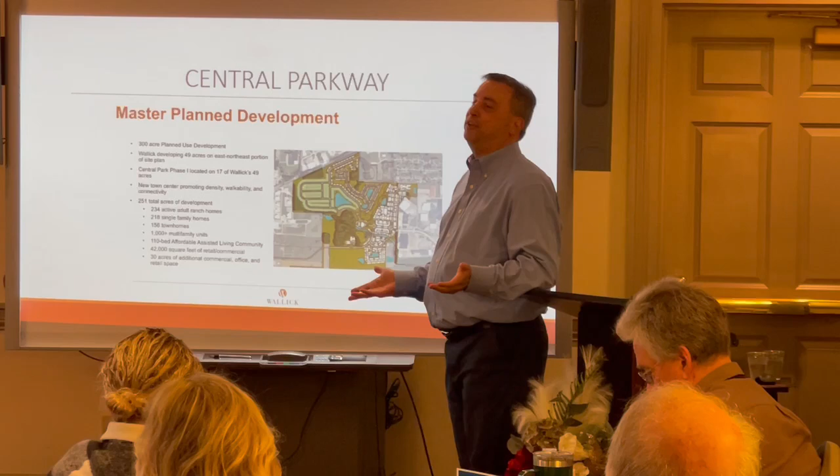You may have heard this quite a bit. I'll tell you, if you think you've heard about this for a long time, I've been working on this for a much longer period of time than that. But I'm excited to say I'm pretty confident that we can anticipate seeing in the second quarter of this year, you're going to see some dirt start to be moved, you're going to see some utility lines start to get run. And this downtown Heath, Central Park, downtown project is going to begin.

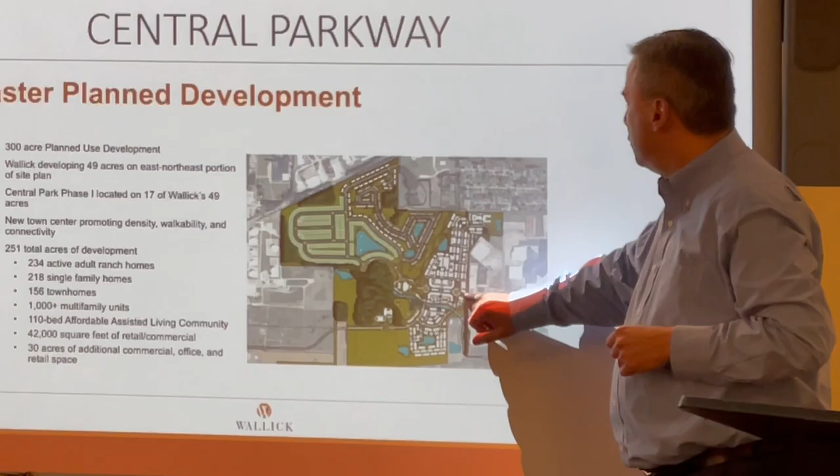Now if you can see on the board here, I'll say phase 1A of this project, you're right here, right now, at the Davis-Shai House. Phase 1A is going to take Central Parkway from where it dead ends, jog a bit to the north, come into this first roundabout, two stubs, north and south. A boulevard that will have diagonal parking in the middle will come through to this western roundabout, stub 1, stub 2.

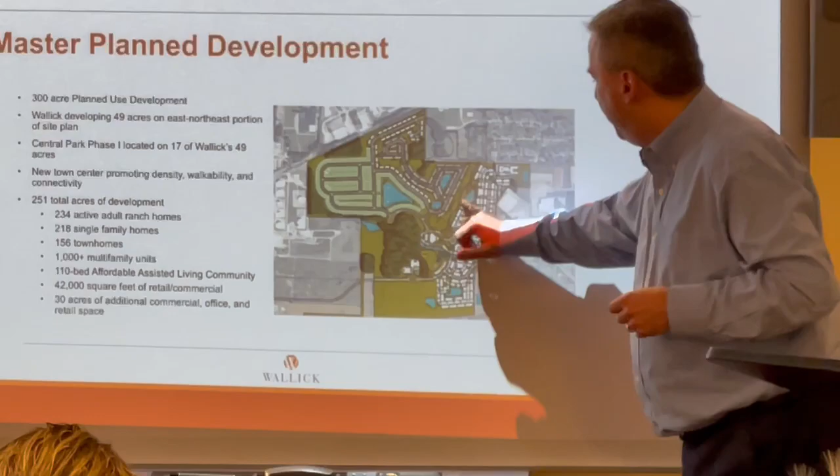Wallick is the company that is developing this piece of the project. So for phase 1A, Wallick is going to construct 2 buildings on either side of the boulevard. First floor of those buildings will have approximately 10,000 square feet of retail, commercial, office, restaurant type space, 40,000 square feet total between the 4 structures. And then each structure will have 3 floors of apartments above them.

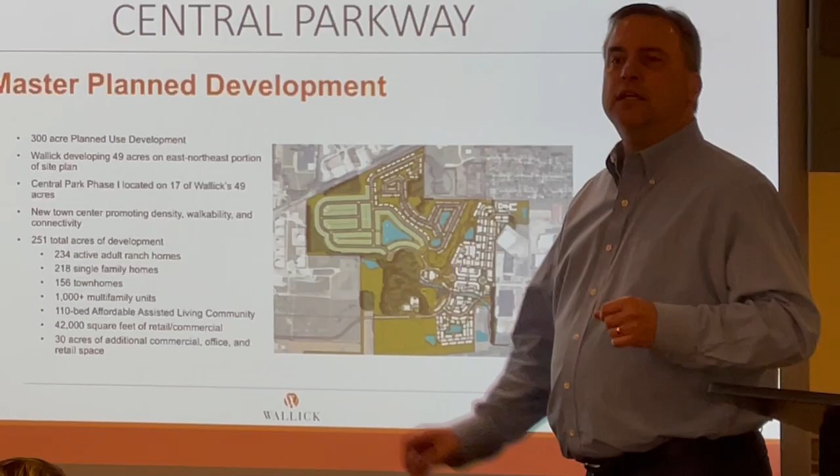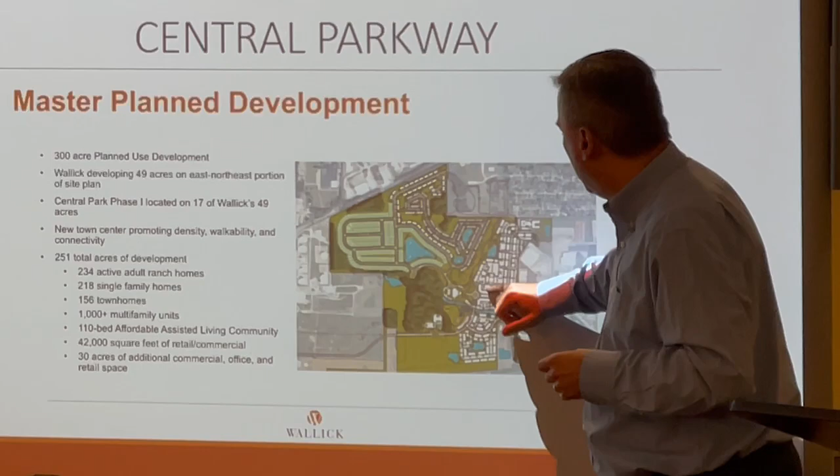Those will sit astride the boulevard, which the city, for any number of different festivals and events, we will be able to close the boulevard down. And traffic will be able to flow around it. We'll be able to close that boulevard down for city events. We'll look to establish a DORA in that area so that people can get a drink here, go to this shop there, that type of thing. Wallick, as part of this phase 1A, will construct the apartments and clubhouse structures that are going to be in this area.

Phase 1B will include Wallick constructing an assisted living facility here up against the residential neighborhood. We always felt that that was probably the quietest thing that you could have next to a residential neighborhood. There will not be a road connection into this neighborhood, so traffic will not flow here, but we're working with the Indian Mound Mall ownership, and we will establish a right of way through here where traffic then will be able to flow through here toward 30th Street.

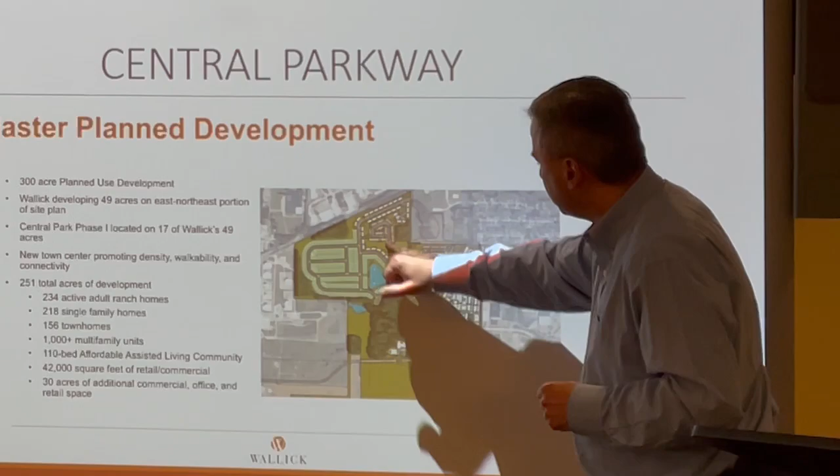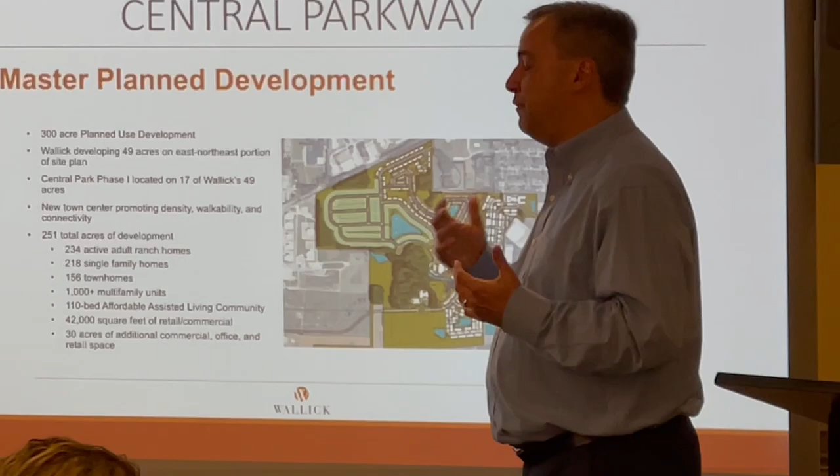Also, as part of phase 1B, this area over here, all of this area over here, our concept is a ranch on slab rental type of a unit. It attracts quite a few empty nesters. This is going to be very walkable, bikeable.

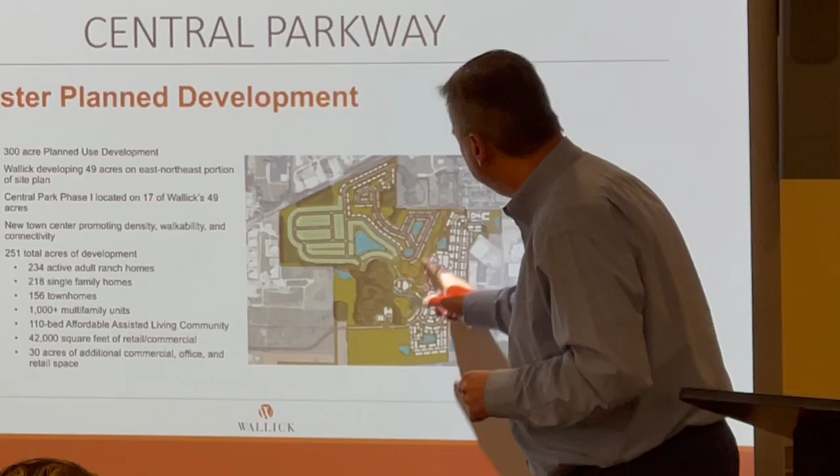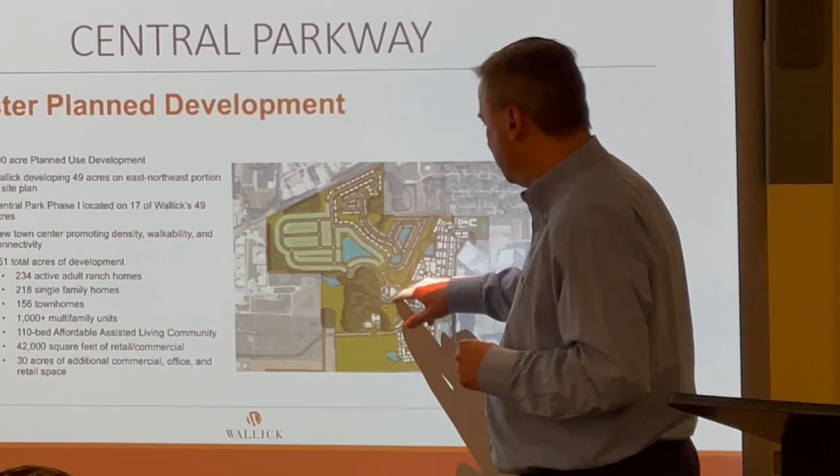You see Geller Park up here, which already exists. This lane through here will become city property, part of a park area. This area in here will become city property, potentially a new city hall, park features, potentially a new police station. So there's a lot of options, and there's going to be a lot of reasons for people to want to be here, and we're going to make it easy for them to walk and bike through the area.

This is a ranch on slab. Natalie, someday, if Emily ever lets us move out of our house, we may want to choose to live there, right? Back in here, we'll be buried in our backyard. What? We'd be buried in our backyard. That's where she wants to put it. Yeah, I know, really awkward.

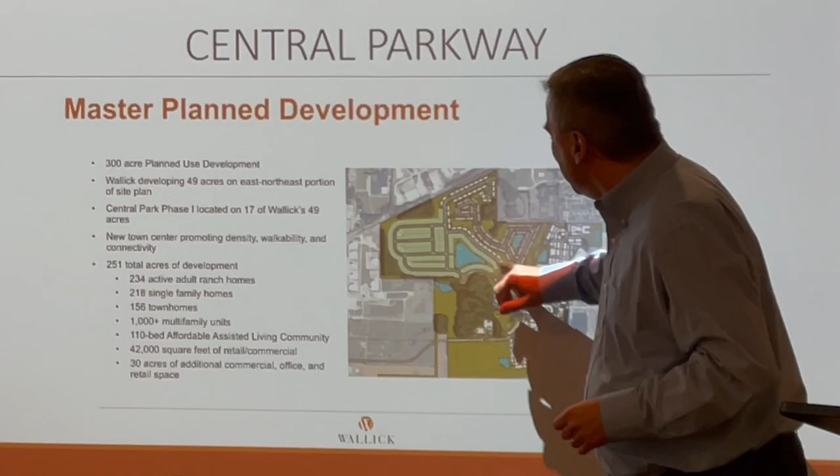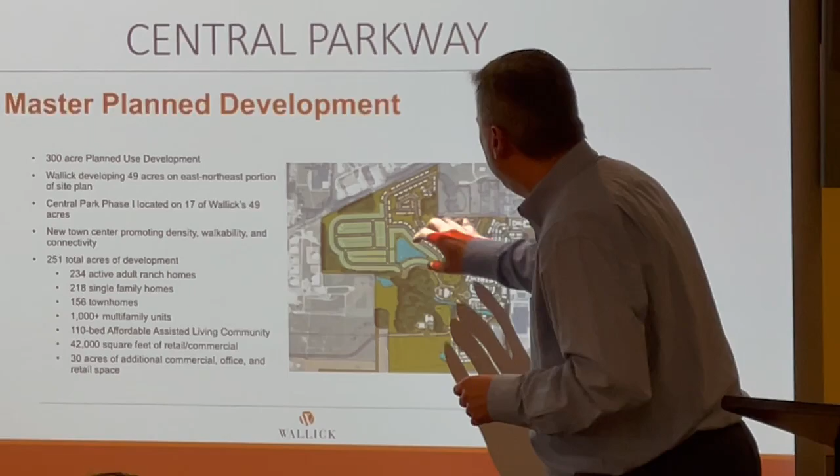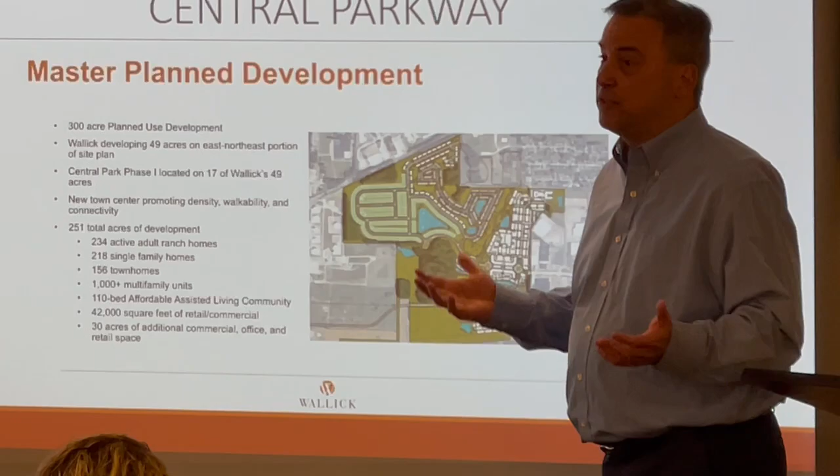Back in this area here, our concept calls for townhouses as well as single-family homes. Those pieces I'll label Phase 1B. And then this area down here, although it shows stuff, there really is no concept. There's nothing solid down in this area, which is fine for now. But we're excited about the possibilities that this could hold.

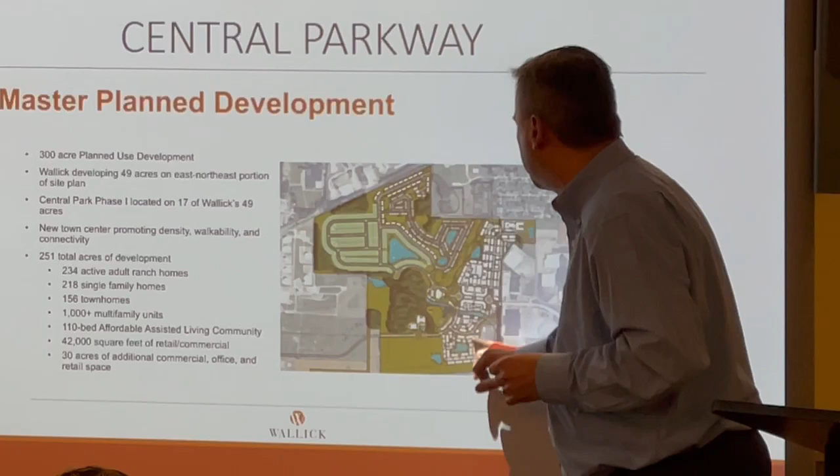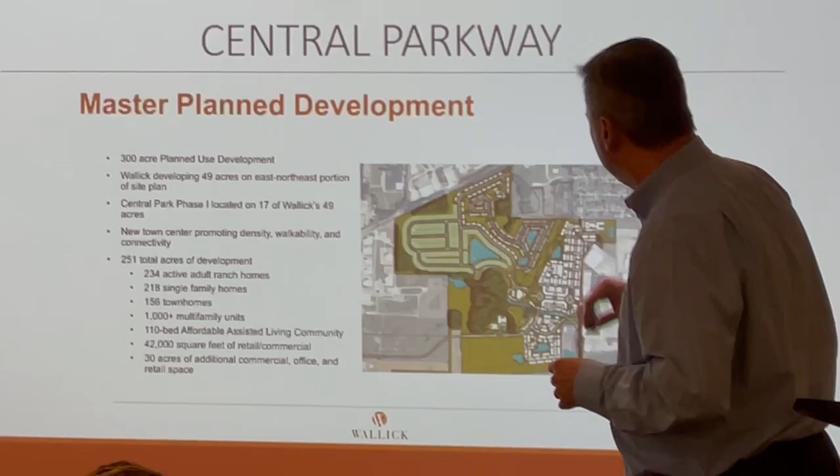So this is, as you might imagine, quite a big development. It's going to take many years for it to build out, right? The development stork doesn't just drop 500 homes in an area at one time. That's just not the way things work. So this will evolve over years and be built out over many years.

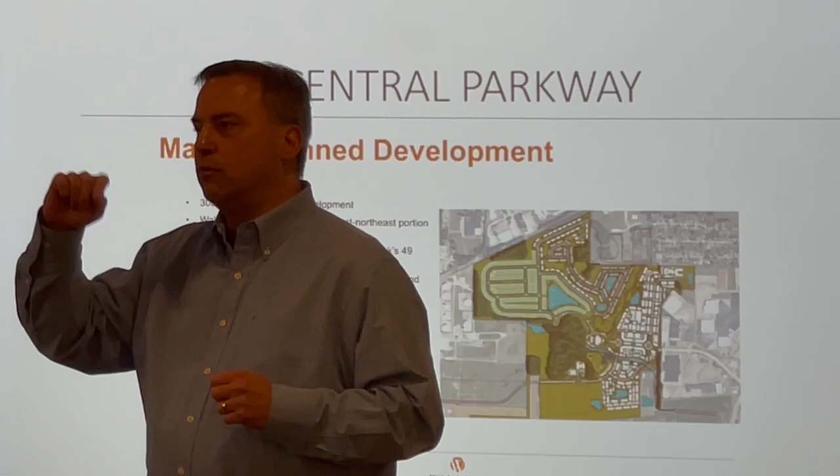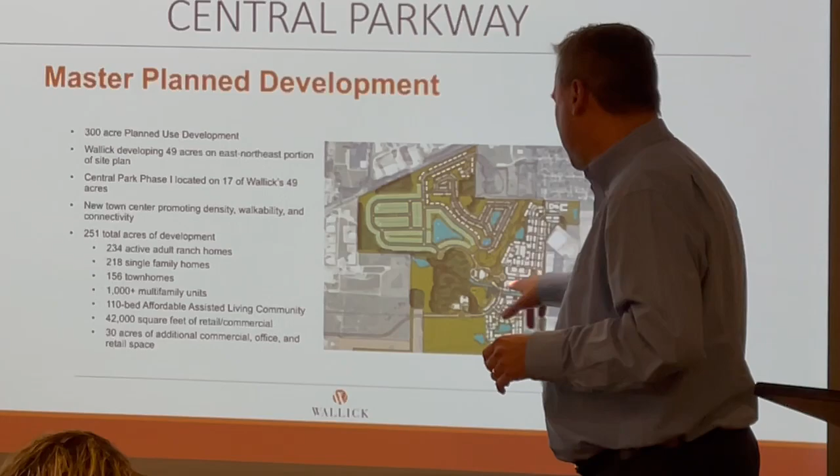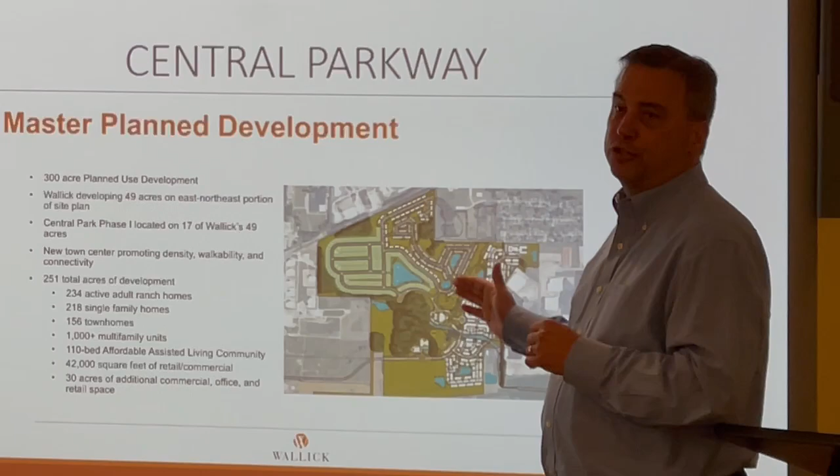But this concept is a realization of what has been a City of Heath dream for decades. I can tell you, when I first became mayor 15 years ago, there were sketches on the walls, in a cabinet on the wall of the City Council caucus room, that were done probably a decade before then, that had ideas for back here. This area has always been thought of as a place where a downtown Heath could be, where our community could have a center to come together for any number of different reasons. And so we're really excited as a city to be part of the public-private partnership that has made this concept, again, you're going to see here soon, start to become a reality.

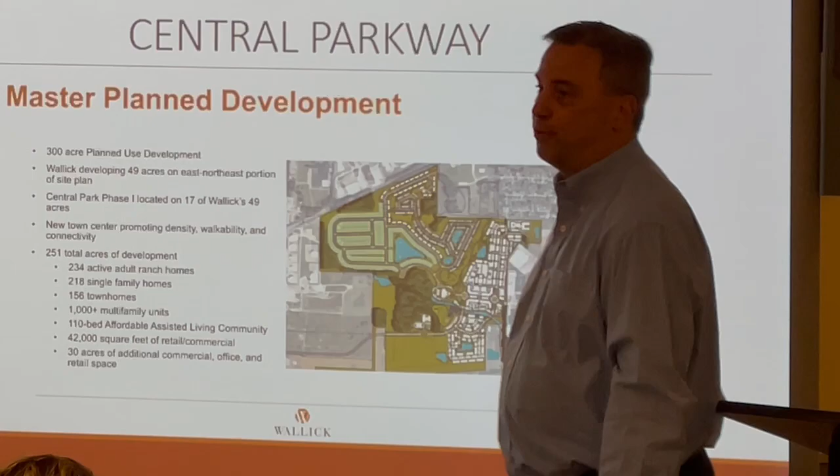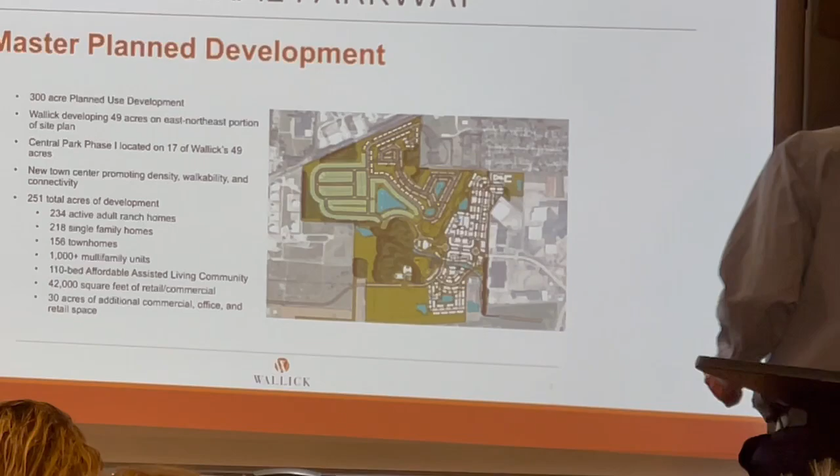Now, along with that, you'll see our concept calls for, eventually, Central Parkway to come through here, drop down, and run out to the west. So that'll segue for me into the next topic that I wanted to talk about.

The Licking County Airport has been established here for a number of years, and the length of the runway is about 4,600 feet, okay?

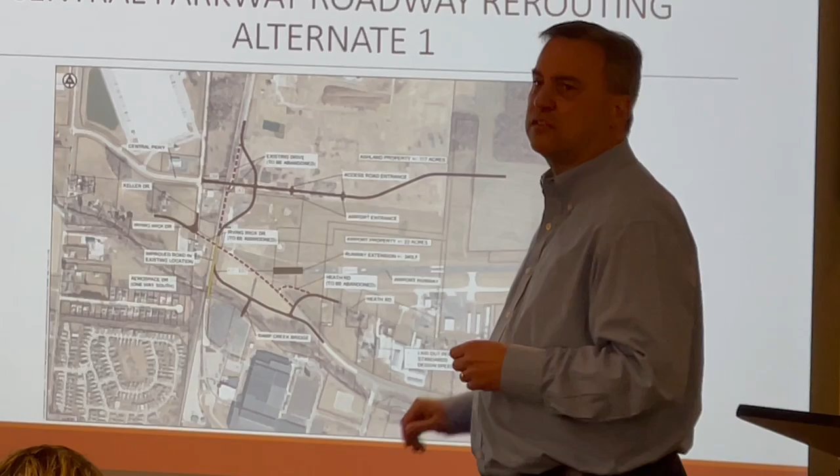If you drive through this area, or if you're Jim Roberts and live in the flight path, you know that this runway is utilized not just by single engine, single prop aircraft, but also we are seeing an increasing number of corporate jets dropping in and out of our area utilizing this runway. Now, that's a great thing for the airport. Its increased usage is helpful.

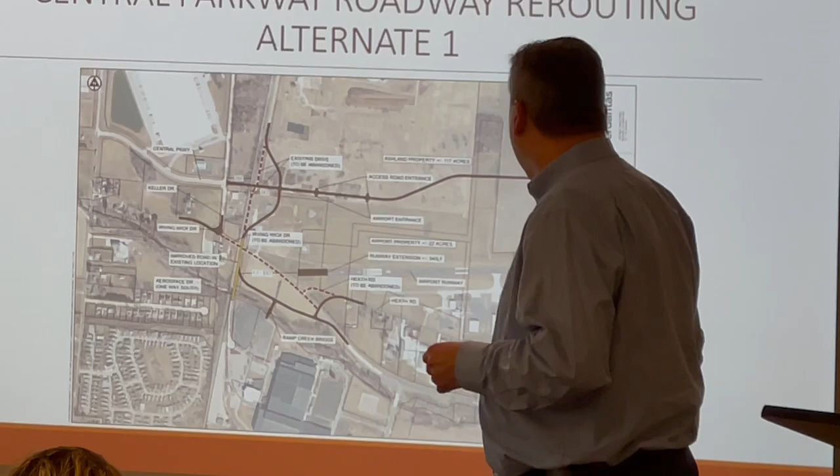I can tell you, when Behr Paint, which would be located maybe down here off of James Parkway, was in the process of evaluating their site at the Central Ohio Aerospace and Technology Center, when they were evaluating the site, when they were going through construction, when they were opening, their executives - I could also see jets from my neighborhood sometimes when they're on approach from the east. I grew to recognize their jet. They were here that frequently. So the corporate use of this runway is increasing as well.

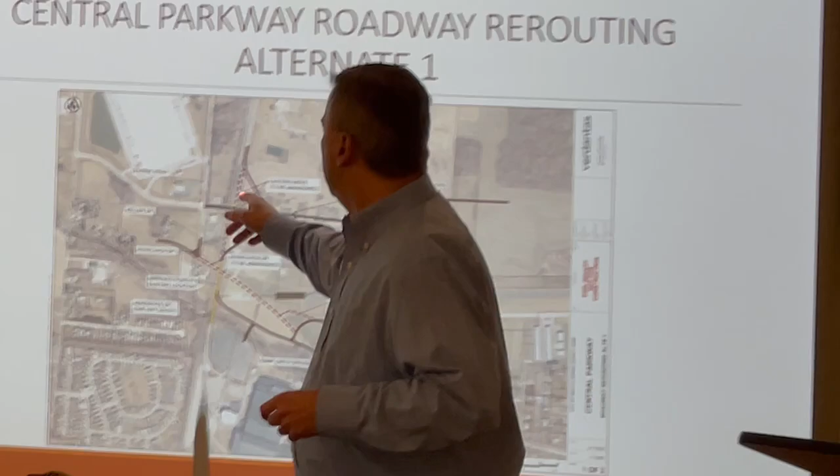There's an opportunity for our community and the airport to work together to mutual benefit, to help get Central Parkway out across a new rail crossing, connecting to where Central Parkway West was constructed as part of the Owens Corning warehouse project a few years ago. Central Parkway West connects to Thornwood Drive.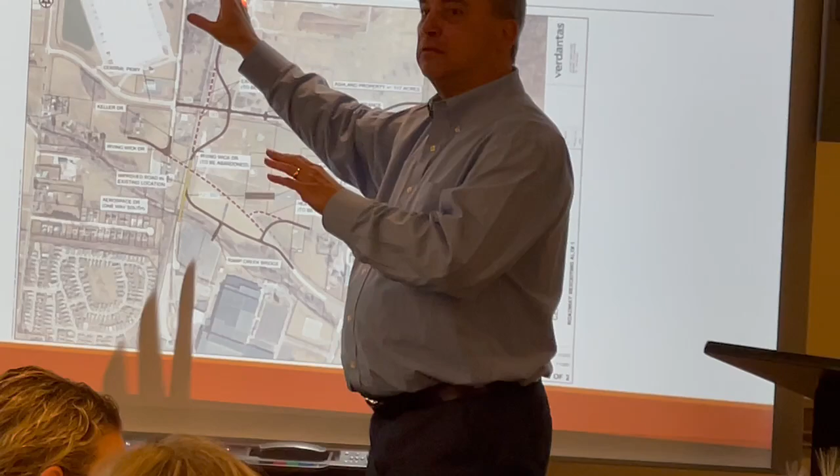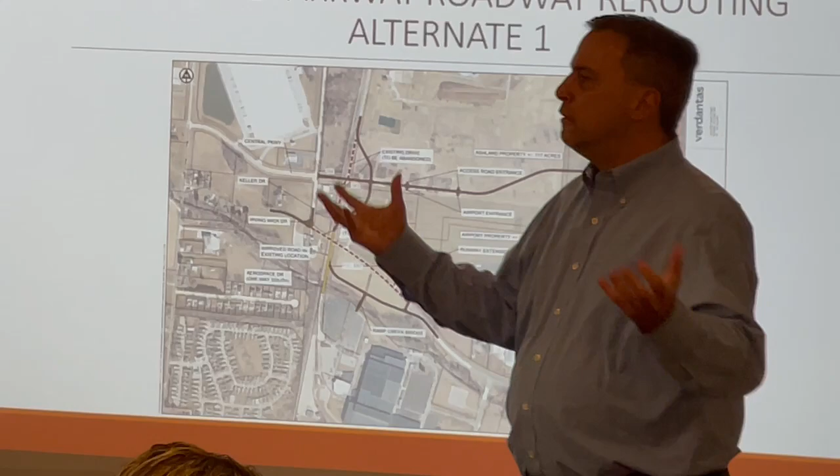As the development happens, it's important that this become the gateway to our community from the west. I have been working with the new property owner that owns these parcels here, with the railroad. There are conversations with Ashland Oil and conversations with the airport

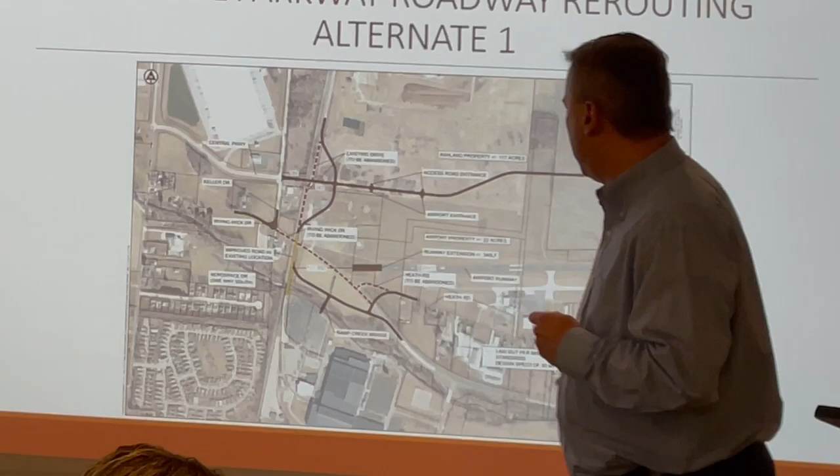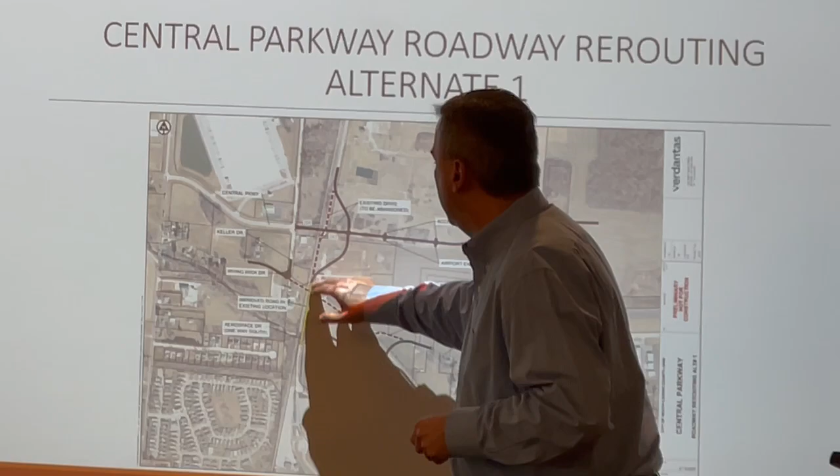for us all to come together and be a big group of we, as I say, who will advocate for a rerouting of Irving Wick that would then come up the very western part of the airport property, connect with Central Parkway here. We would close our rail crossing at Irving Wick, come across here to a new rail crossing, and then go across.

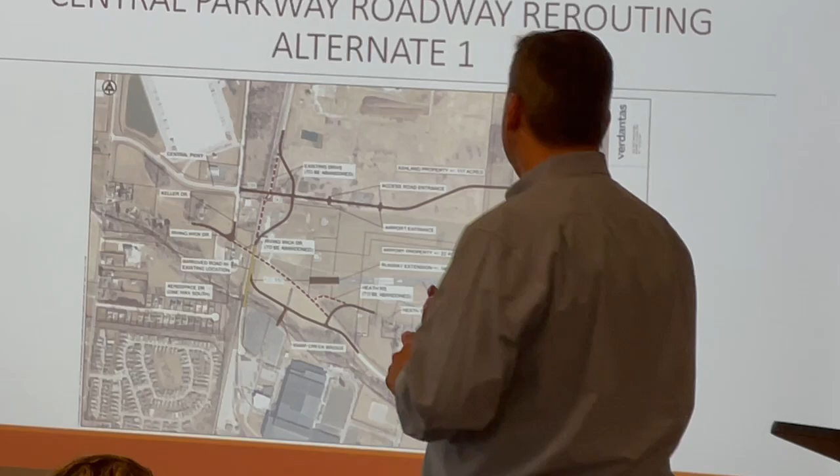Obviously, for the city, it provides an avenue, a way, getting Central Parkway out to the west. For the airport, the impact probably is going to be equally strong.

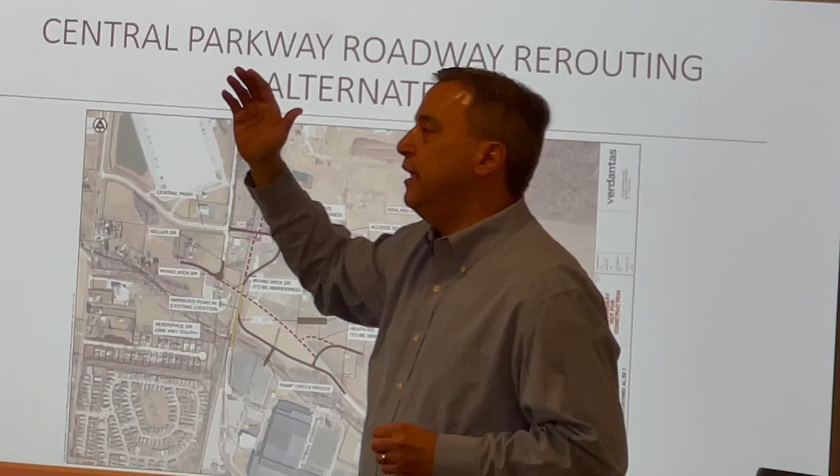Doing this would provide the airport with an opportunity to extend their runway to just shy of 5,000 feet. Now that's a key number. When a runway is more than 5,000 feet, it can be reclassified for a higher use. The problem is, if you didn't notice them when you came in, you'll notice them when you drive out of here. There are hills to the east of us that would impact the cone of airspace clearance that would be needed to reclassify the runway.

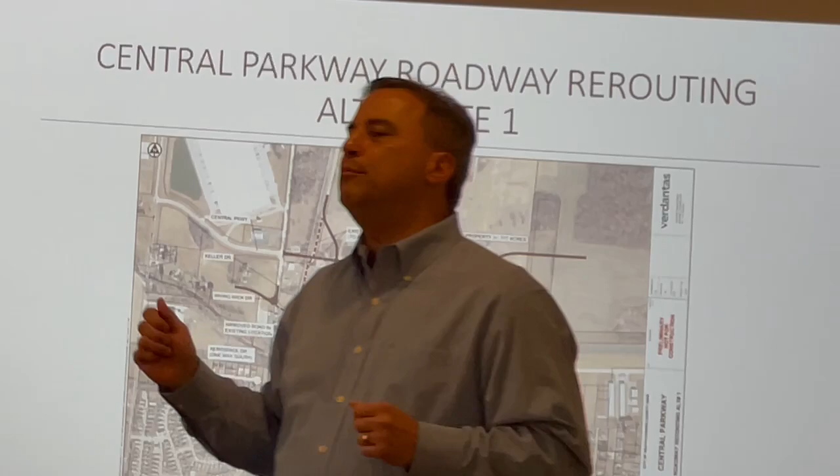So the runway would not be more than 5,000 feet, but if they could get to just shy of 5,000 feet, for insurance purposes of the planes and jets that come in here all the time, it would be beneficial. It would also increase the number of inclement weather days those aircraft could still utilize this runway, because they would have roughly another 350 feet of runway to work with.

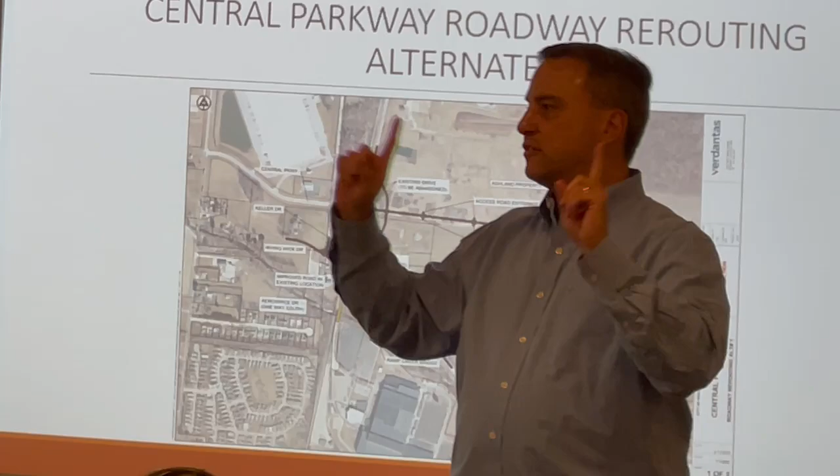The airport has long wanted to get this runway extended. Part of this will give them the elbow room to do that, and they will end up with more distance between the rerouted Irving Wick than what they have today with the shorter runway and where Irving Wick is today. So they can extend the runway and get a little more elbow room, a little more distance from the traffic to the west of the runway.

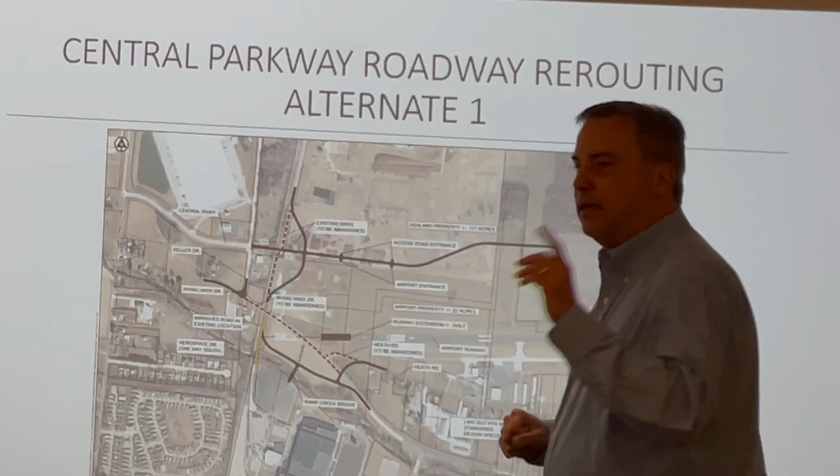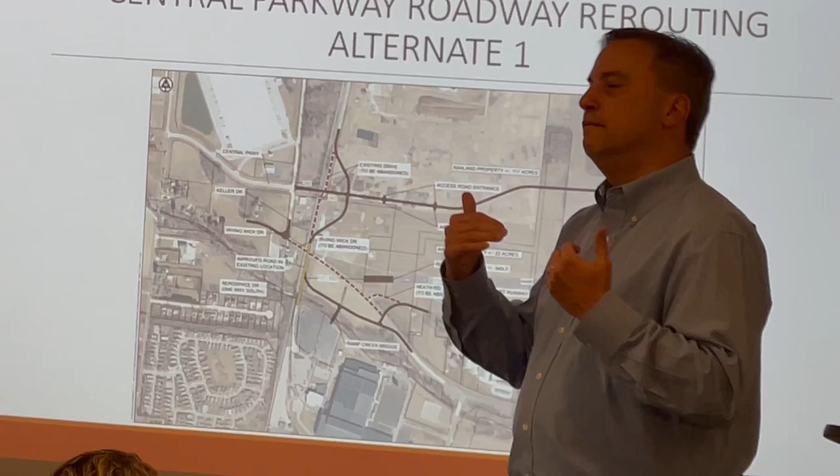Here's the other big benefit for the airport. They have built an increasing number of hangars on their property. They tell me their hangar space is very, very limited. But there really isn't a whole lot more area on which to build hangars on the south side of the runway.

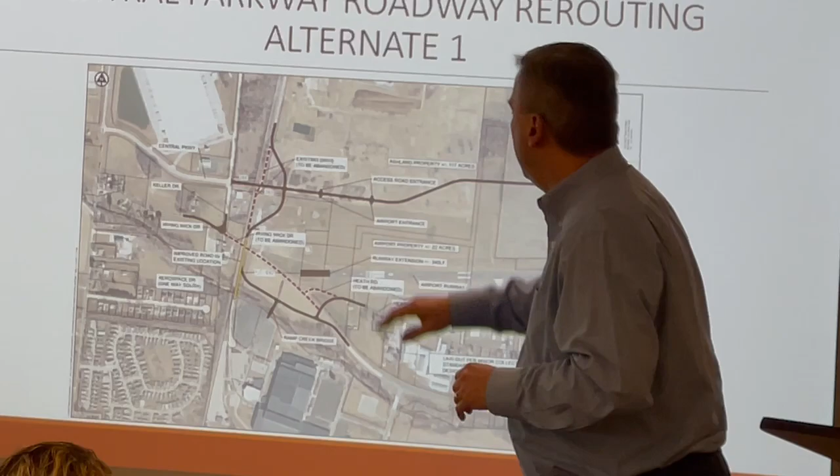We've got all this to the north of the runway. If we can get Central Parkway through, they now have access to that land on the north side of the runway. They could begin to build hangars if they need, and we, of course, can ensure that they would have street road access to those hangars.

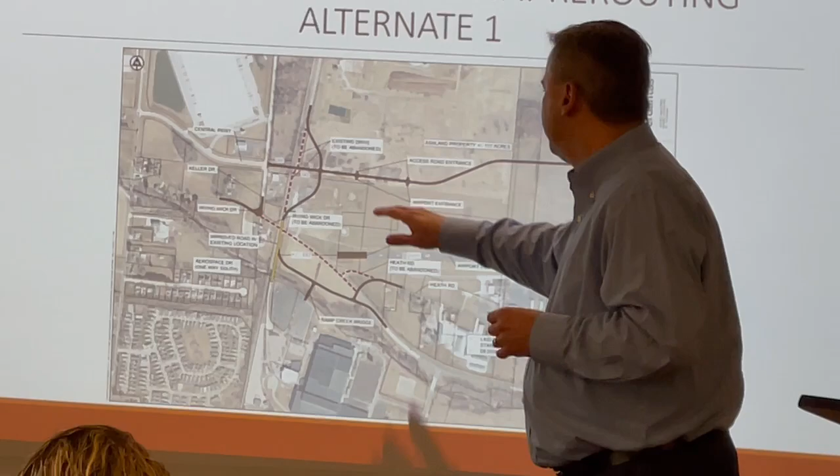Not only would the airport have the ability to expand their runway, they would also get additional land to utilize for additional hangar space, which should, it seems reasonable, continue to increase the usage of the county airport itself.

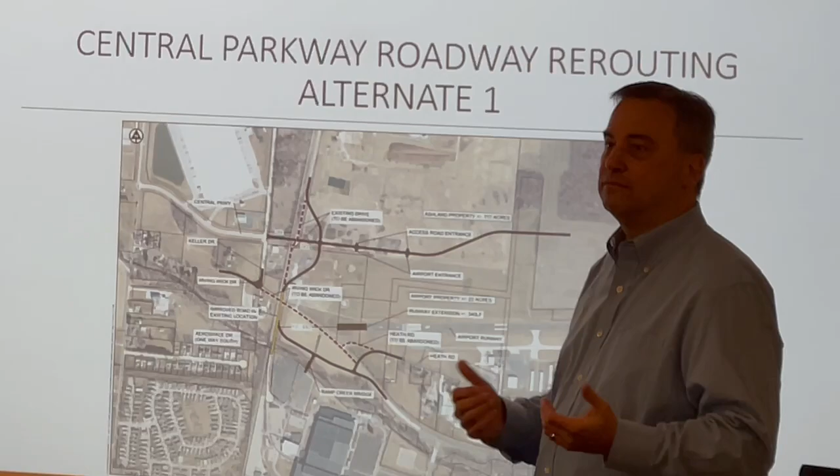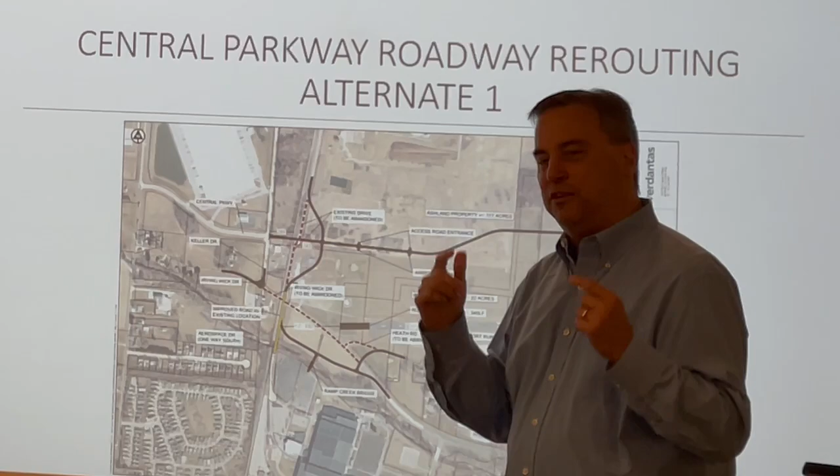So, we have engaged with the airport. I will continue to do so. I know they have a rescheduled board meeting that starts at 4:30 this evening, and I will be there to continue to work with them in an effort to make generally what you see here happen.

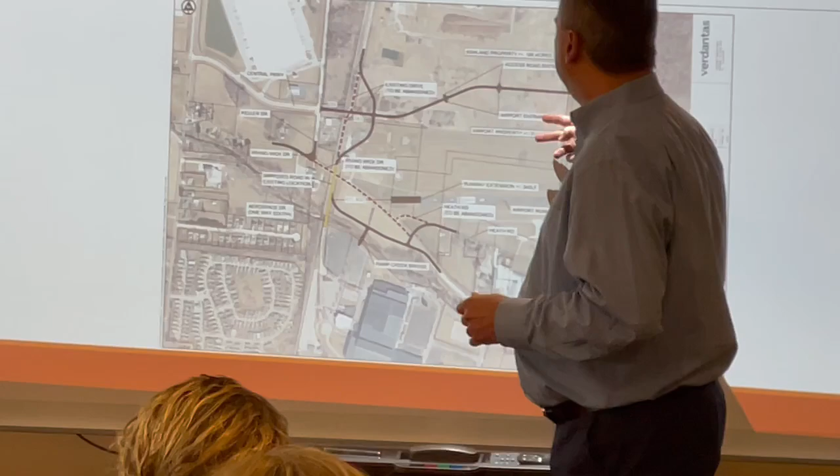This is just the same concept, but showing the road potentially going a little farther to the north. If the airport would want to acquire some ground here, if they, for some reason, wanted to put hangars a little farther distanced from the runway. Other than that, it's the same concept.

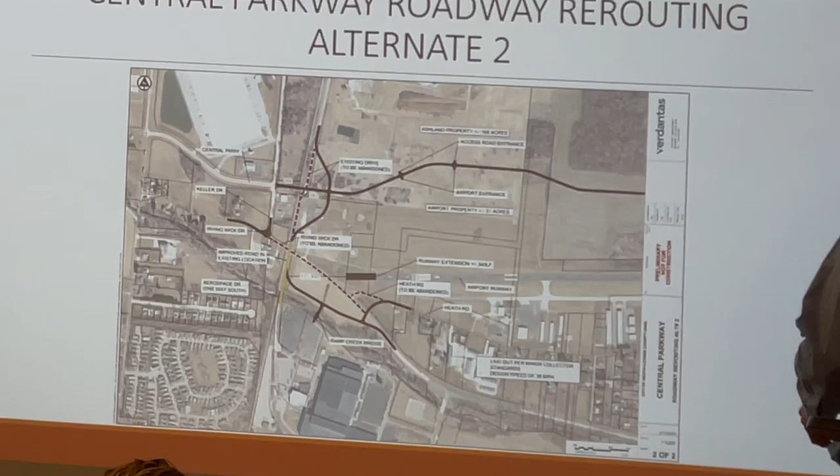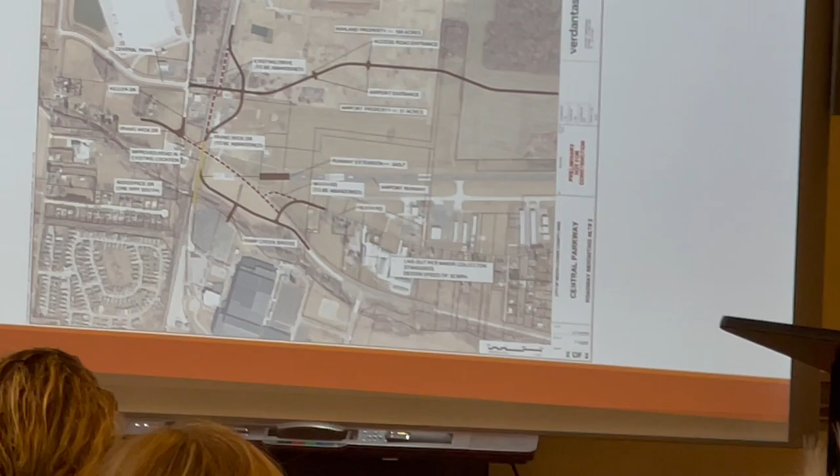Now, I mentioned Central Parkway being rerouted, eventually connecting with Thornwood. I'm just checking the time. Want to be good, you folks.

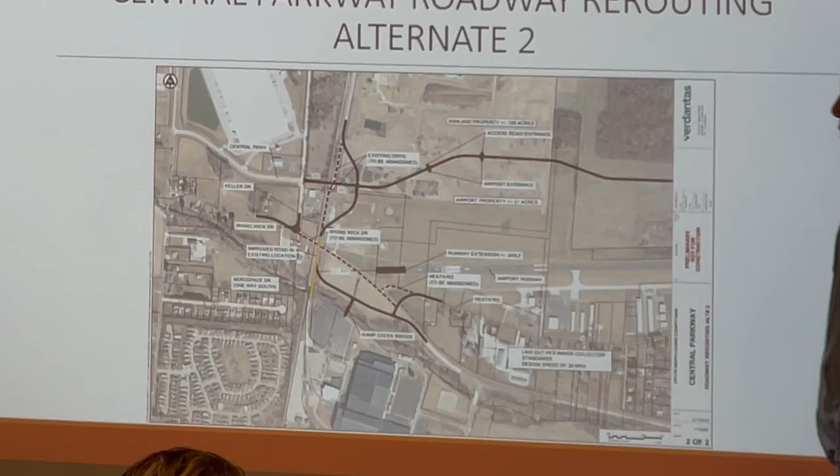That's a good segue for what I want to talk about next, which is the Microsoft data center project that is in the city of Heath. This is from their submittals to the city showing their site plan.

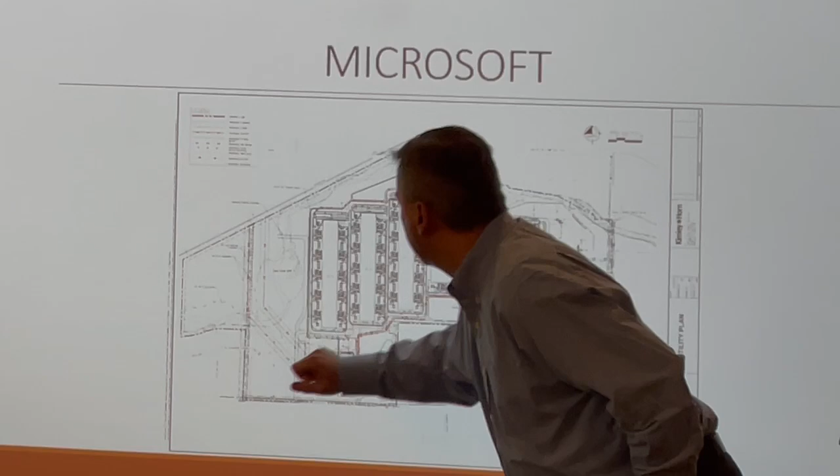Now, this is Thornwood Drive. So this property sits on the west side of Thornwood Drive. This is Lee's Road right here. This is railroad tracks right here. So that kind of orients you to where this property's at.

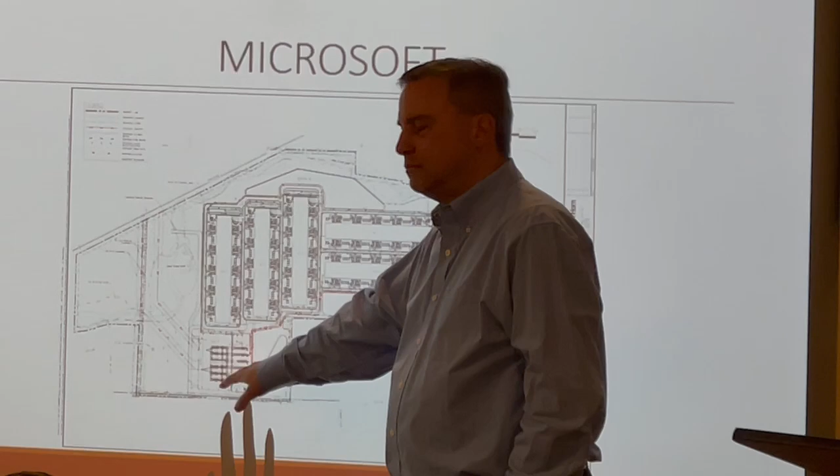Their concept, their layout for the site calls for the construction of an electric substation and up to 5, 250,000 square feet each data center buildings.

Now, their concept here is similar to what their concept is for the land that they acquired in the Hebron area. I want to say maybe they can fit 6 buildings on that site. I'm not 100% sure because I'm not involved in that, but I think I've heard that.

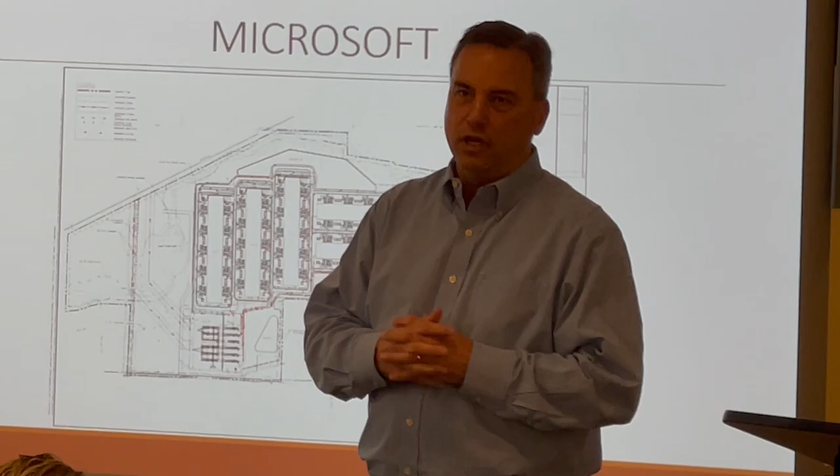Now, this also, the data centers do not drop 5 buildings onto the site at once. So you're talking about these buildings, then these buildings, all told, perhaps an 8 to 10 year build out of the site.

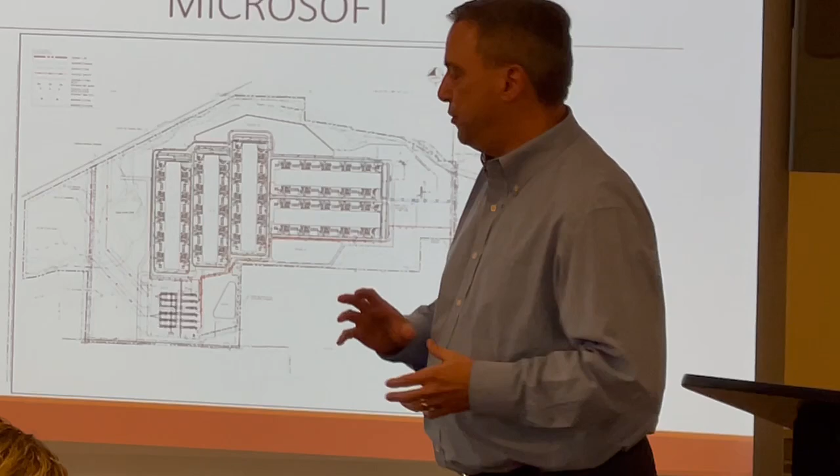But there's 2 very important agreements that the city and Microsoft entered into that I want to mention. And I'll tell you the story about the first. The first is a payment in lieu of taxes agreement between Microsoft and the city.

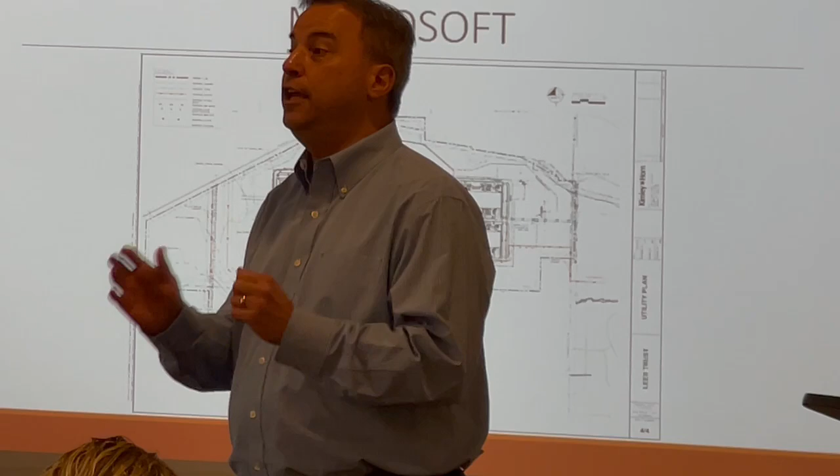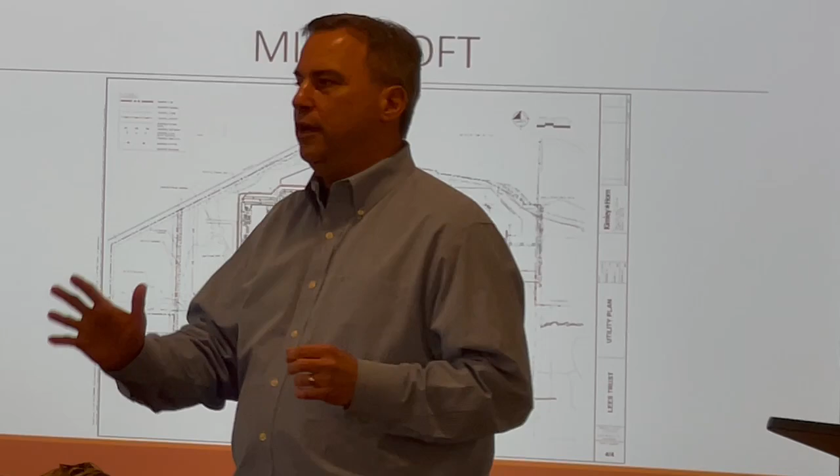So, about a year ago now was the first time that I sat down with the tax team from Microsoft. And this land was included in the city's pre-1994 community reinvestment area for the city. A pre-1994 CRA is like the gold standard of property tax incentives, particularly for manufacturing.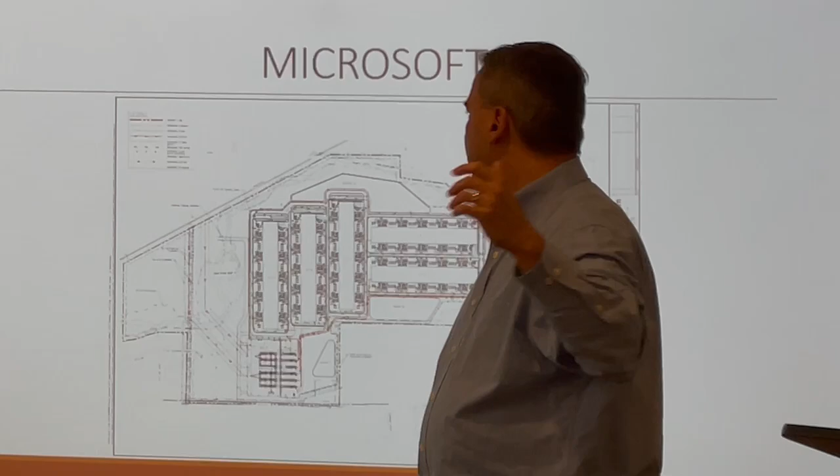Our community over the years have benefited greatly from our pre-1994 CRA. Over the last 15 years, if you look at all the buildings that have been built along Kaiser Drive, James Parkway, Thornwood, the ones that are there, the ones that are coming, the pre-1994 CRA has been huge in helping to bring those manufacturers, those jobs to our community. This is a pre-1994 CRA.

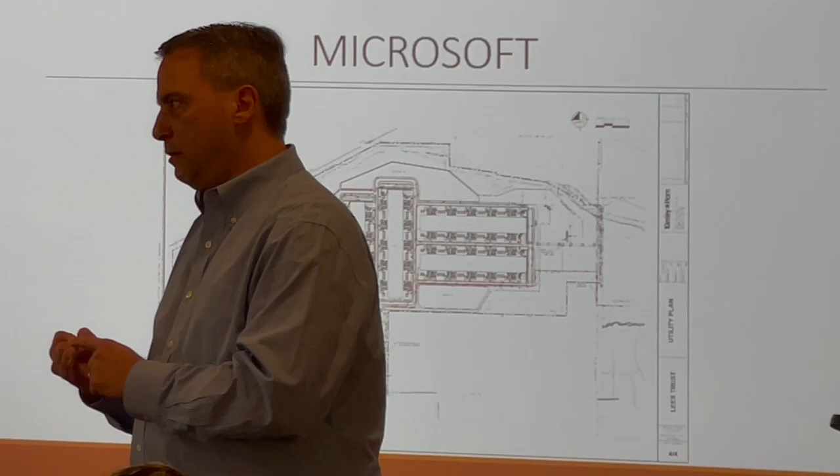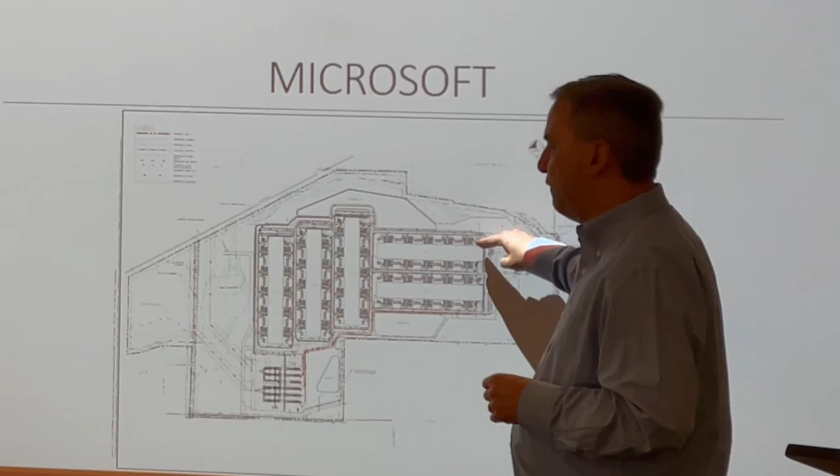Now for manufacturing, that means that the owner has a 100% property tax abatement on the improvements that they make to the land for a 15-year period of time. And they work this way. When this building gets done, the 15-year clock starts. Let's say it takes another 2 years to build this one. They'll apply for another CRA, that 15-year clock starts, and so on and so forth.

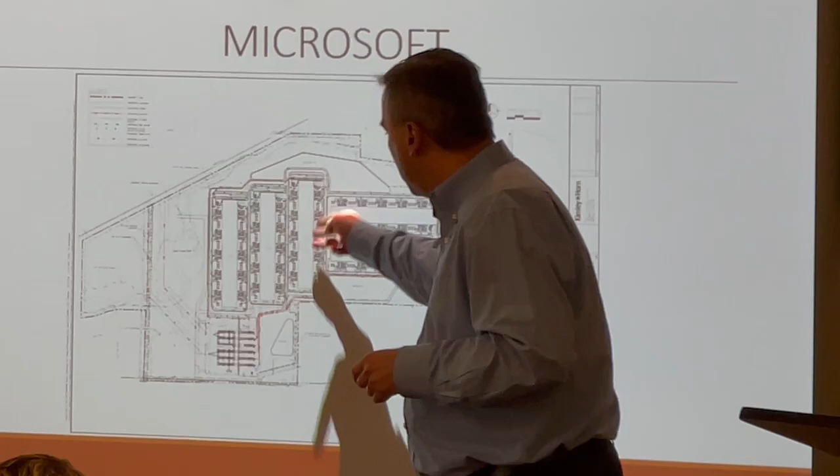So I'm sitting down with their tax guys, and one guy says, explain how the city CRA works. And I've, of course, explained this before, meeting with manufacturing prospects in our community. And I said, look, it's a piece of cake. It's already established. You automatically get it. There's no negotiating anything. You fill out half of one sheet of paper, and you turn it in, and it's done.

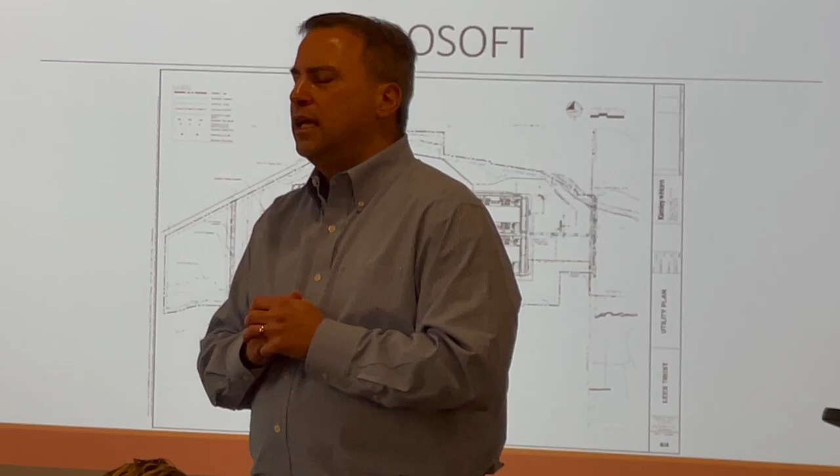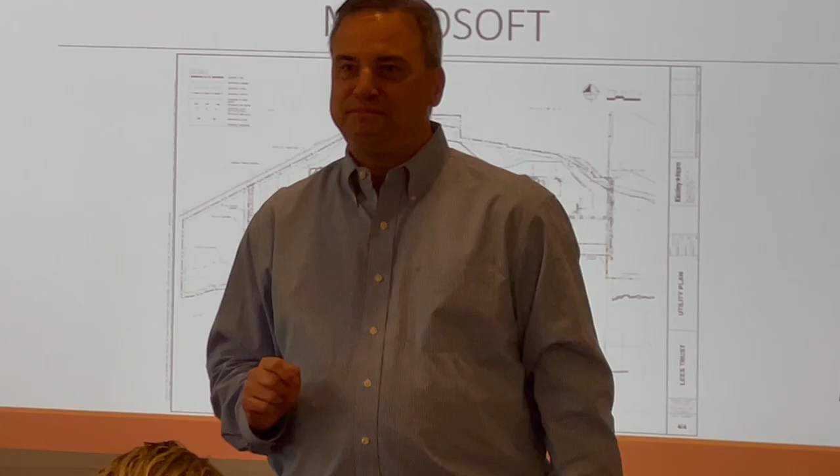The guy looks at me, he says, wow, okay, can we do something else? And for a split second, I'm thinking to myself, what in the world else could you want? Other than 100% abatement for 15 years on the improvements that you're going to make. But it was for only a split second, because to his credit, he quickly said afterward, because we don't want to be seen in the community as a taker.

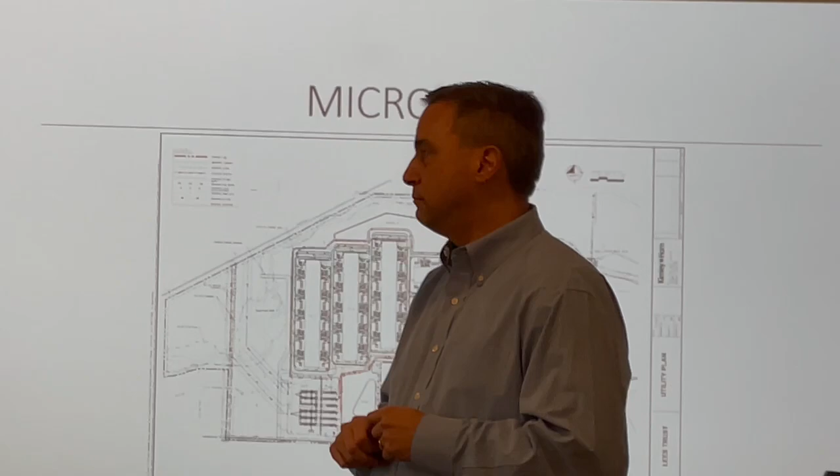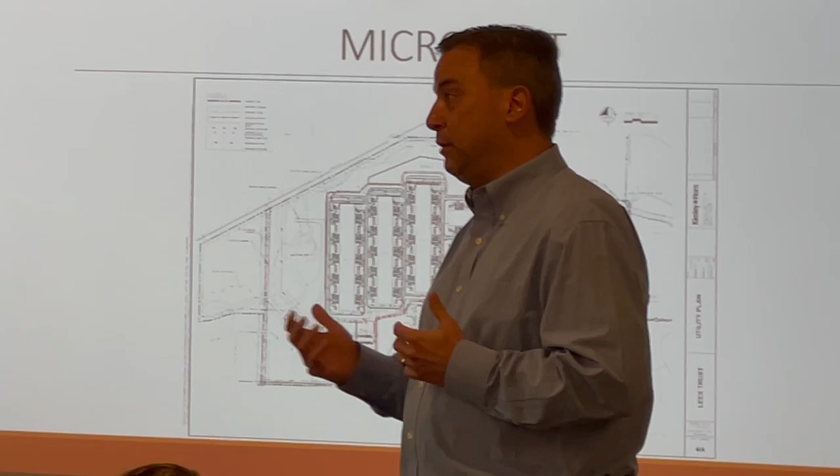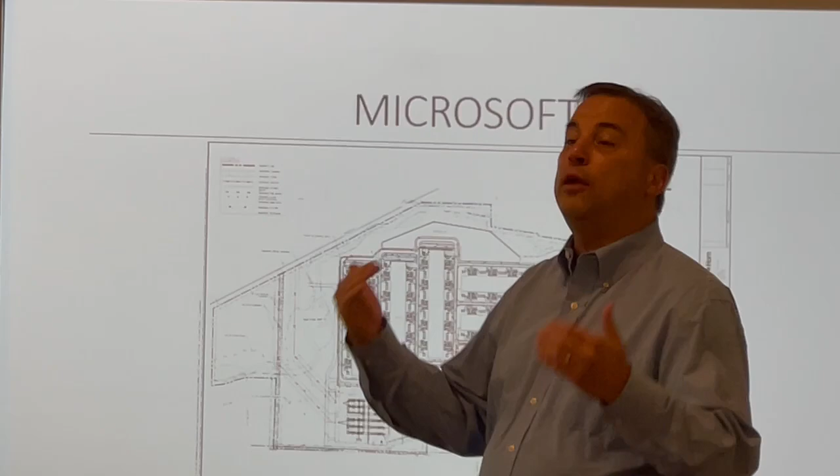So we want to pay. And I picked my jaw up off the table, because I never heard that before. And I said, well, okay, then we're probably talking about a payment in lieu of taxes agreement, a pilot. They get the abatement, but they have agreed to pay to the city of Heath 100% of what they would have paid to the city of Heath had there not been an abatement on this property at all.

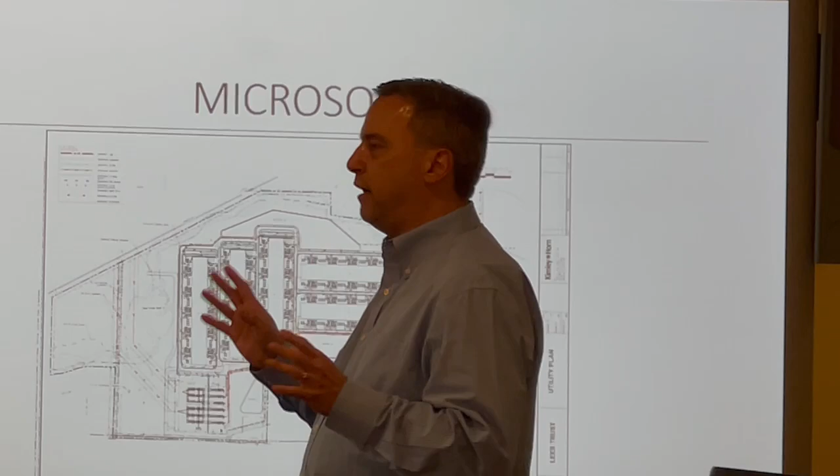Now, I had a meeting last week with the superintendent of the Lakewood School District to update him on any number of different development things happening in Heath that impact Lakewood, and this was included. Now, I'm not privy to their situation, but I'm fairly sure that Microsoft will also not want to be seen as a taker as it relates to the Lakewood School District in which this ground sits.

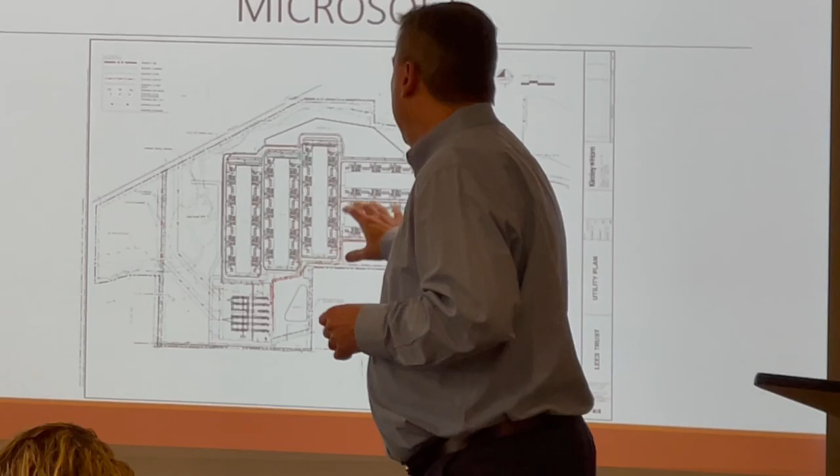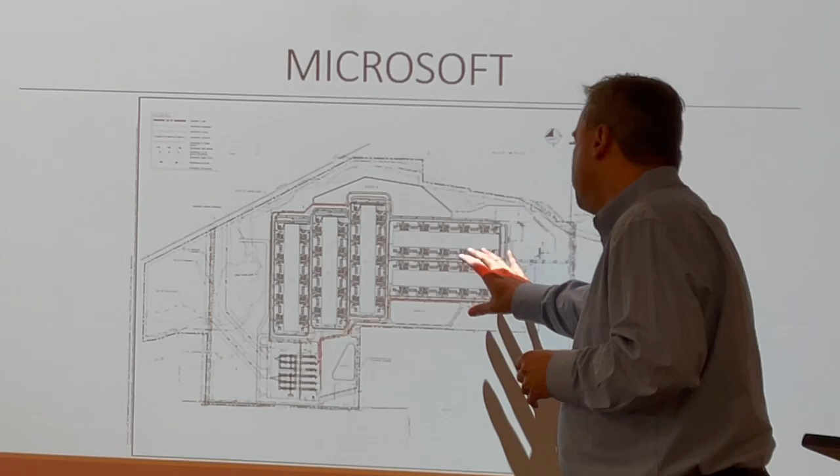And I'll leave it at that. Which, again, it's wonderful that Microsoft is partnering in our community in that effort.

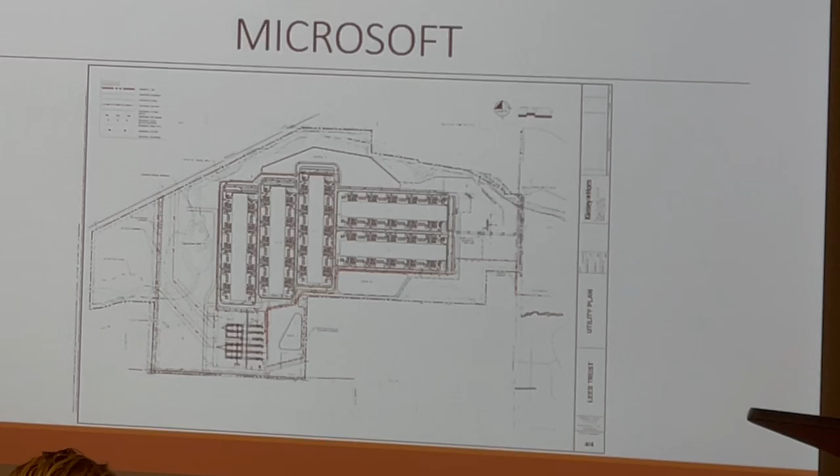Cough drop number 2. Here's the other agreement that I want to sort of mention. We have an agreement with them that is an infrastructure projects agreement. Microsoft was very willing to understand what kind of infrastructure improvement needs their project may bring to the community, and to be a partner in helping to make those infrastructure improvements happen.

So, I showed you the southern part of their property, which is Lee's Road.

Lee's Road is going to be used by them for construction. We said Lee's Road today cannot handle that.

So Microsoft has agreed to have the city do a project that will widen Lee's Road to the city limit, which is the western part of their site on Lee's Road. We will also run a water line and a sewer line to those points, which Microsoft's project will utilize. The sewer line will help them avoid having to install a lift station on their property, and the water line will provide them a dual redundant feed.